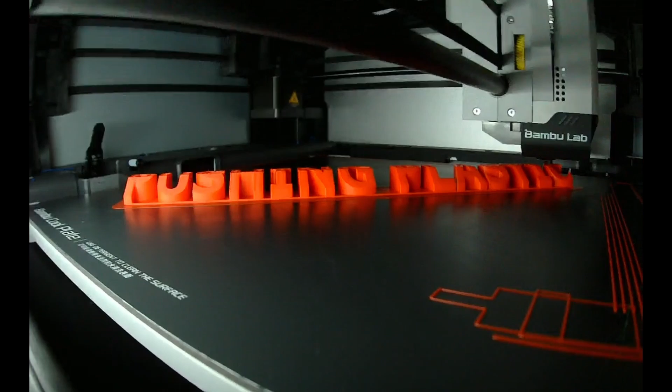I'm going to use this oversized chess pawn to demonstrate what adaptive layers are and how to use them. The first thing we'll do is add adaptive layers to our settings menu by coming up here to the search bar and typing the word adaptive. And the category for experimental settings comes up right away. Now, adaptive layers have been a part of Cura since sometime around 2017 or 2018. I'm not sure why they're still considered experimental.

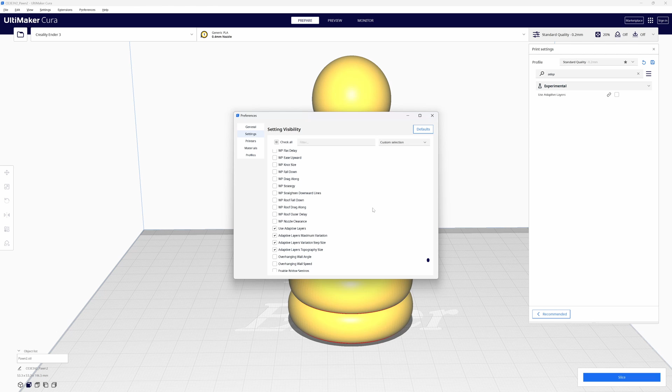Click on the settings symbol and scroll on down until you find Use Adaptive Layers and check the box. Also check the boxes for Adaptive Layers Maximum Variation, Adaptive Layers Variation Step Size, and Adaptive Layers Topography Size, and close out the Settings Visibility dialog box.

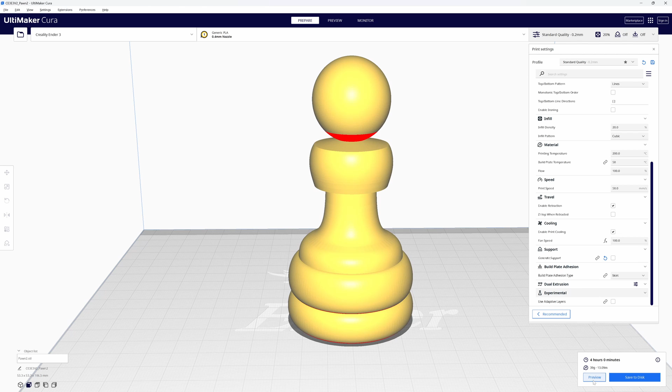Now scroll on down in the print settings to the bottom and you'll find experimental settings. And there's where the adaptive layers options are. I'm going to leave it unchecked for now. Let's slice this and take a look. It's going to take 4 hours to print with the standard quality 0.2 millimeter layer height profile that comes with Cura. Let's take a look at the preview.

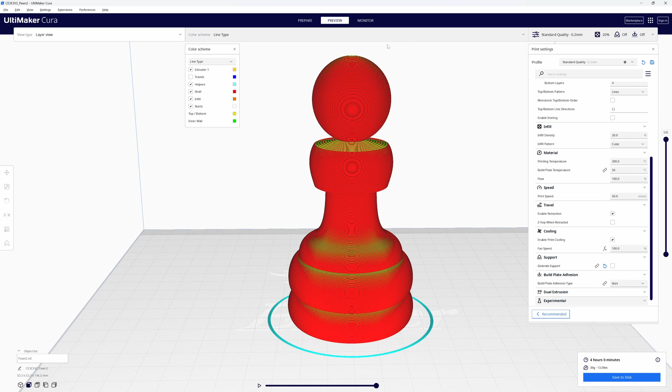And as you can see, there really isn't anything different that we haven't seen from any other slice profile or model. Now, take note of the number of layers, 532. Now let's come up to the top of the screen and take a look at the bar that says color scheme. It's currently set for line type. Click on that bar and change it to layer thickness.

Now we're looking at a greenish blue preview. This color bar over here is showing our thickness range. Currently the dark blue is showing a layer height of 0.2 millimeters, and yellow is also showing 0.2 millimeter layer height. In the middle is this greenish blue area. No big deal there, right?

Yeah, I know. Get to the point already.

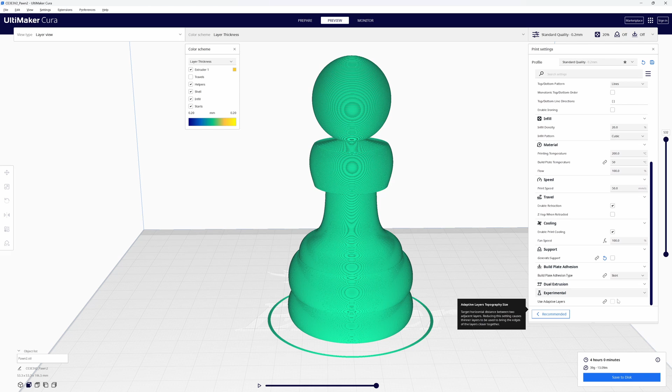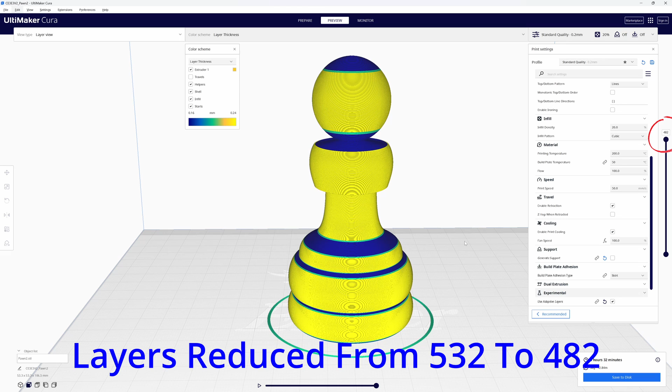Okay, so let's enable Use Adaptive Layers and reslice. Now we've got all kinds of cool colors going on here. Before we get into the colors, notice that we dropped off almost 30 minutes from our print time, and our layer count went from 532 down to 482. Our model is still the same physical size. It's just using fewer layers, less time, and less material.

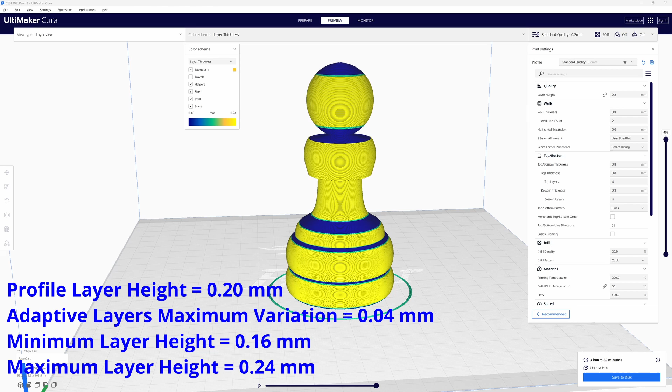Now, let's look at our settings and see what's going on. The first setting we're going to look at is the maximum layer variation. We're currently set to 0.04 millimeter. Our profile is using a 0.2 millimeter layer height, so our layer size range will be 0.16 millimeter at its smallest height and 0.24 millimeters at its tallest layer height. It's basically taking our layer height and applying a plus or minus value of 0.04 millimeters when needed.

So when we look at this color scheme for the piece, it's showing a layer height of 0.16 millimeter for the dark blue. It's taking the maximum variation of 0.04 and subtracting that from our layer height in our profile of 0.2 millimeters to give us 0.16 millimeters. Wherever we see the dark blue on the model, we're going to be printing at a layer height of 0.16 millimeters, giving us a better quality on all of these curves and the slopes.

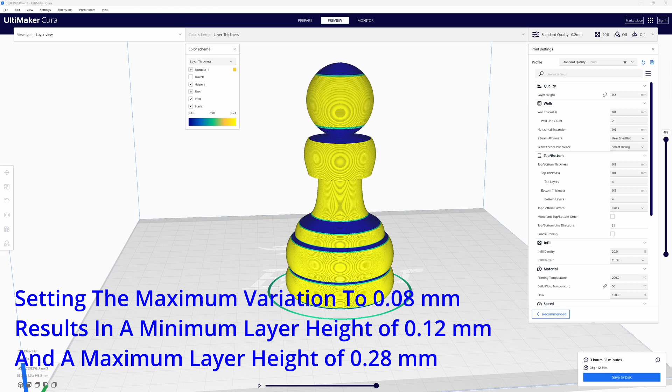If you were to set the maximum variation to 0.08 millimeters, those layers would print out at 0.12 millimeters. That's the same as Cura's super quality profile setting. The yellow area, those layers are now printing at 0.24 millimeters instead of 0.2 millimeters. We went up in height by the value that we have set in our maximum variation. You'll notice that happens in the areas that are straight vertical parts or just the areas where the curves aren't really detailed. You'll also see some areas of the green that's still printing at 0.2 millimeters.

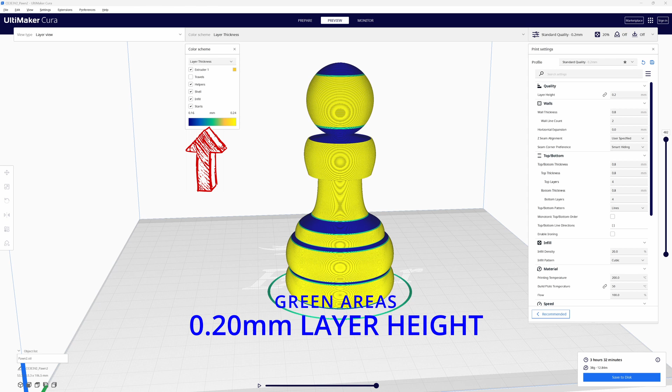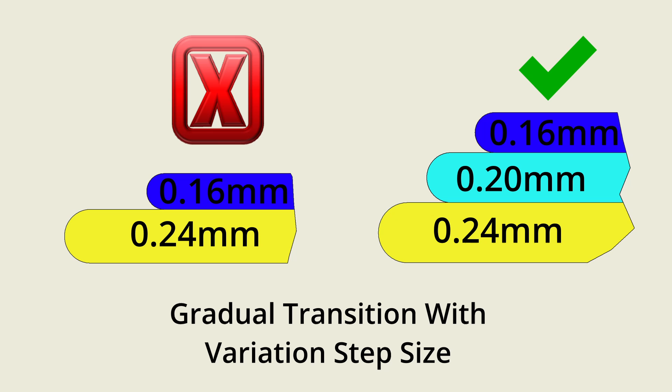The next setting we're going to look at is the adaptive layer variation step size. This is the increase or decrease of the next layer when compared with the previous layer. Since the layer height range we're using is from 0.16 up to 0.24 millimeters, we don't want one layer going from 0.16 right up to 0.24 millimeters. That would leave a pretty nasty appearance. You would want to go from 0.16 to 0.2, then up to 0.24 millimeters.

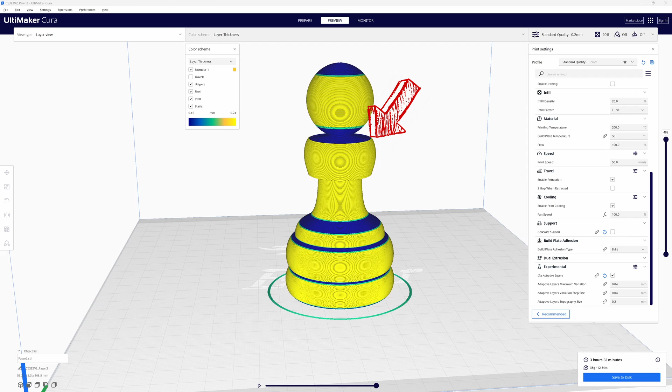If you look at our sliced model, you'll notice that in almost every case, the yellow areas that are using the 0.24 millimeter layer height are separated by at least a thin green band where it's printing at 0.2 millimeters to make the gradual transition to the darker blue area of 0.16 millimeters. Except for this area right here, where there's a sharp edge rather than a gradual curve. Pretty smart of Cura to figure that out for us.

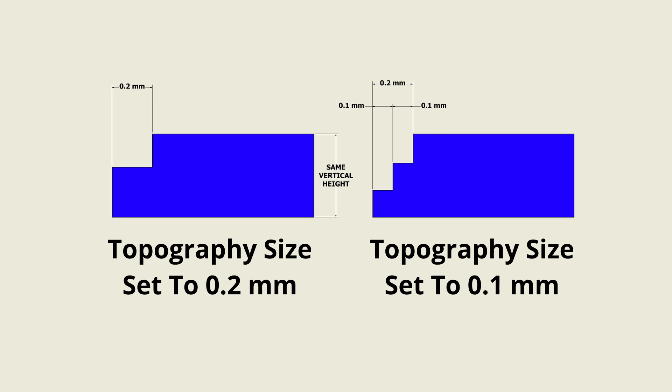The final setting is the adaptive layers topography size. This setting is the horizontal distance between two adjacent layers. I like to think of this as like the tread on a staircase, except in this case, as the tread changes, so do the risers, meaning more or less steps to climb to reach the same vertical distance. If you increase this setting, thicker layers are used and the edges of each layer are moved further away from the previous edge. Decreasing this setting will use thinner layers and bring the edges of the layers close together. This gives us a nicer looking transition in curved or sloped surfaces.

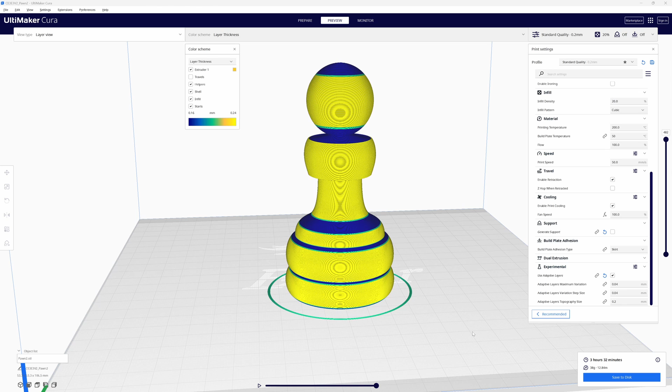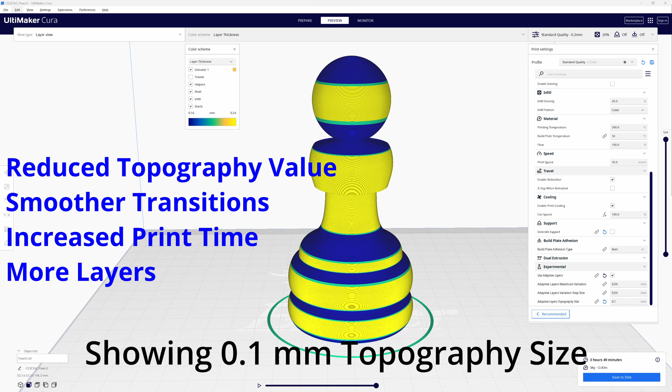But going too low is going to increase the number of layers and increase the print time, as we can see when we compare the same chess piece with a 0.2 millimeter topography size and changing the topography size to 0.1 millimeter. Our print time increases from 3 hours and 32 minutes to 3 hours and 49 minutes, and our layers increase from 482 all the way up to 524. But overall, the physical height of our model has not increased at all. I almost always use the default setting of 0.2 millimeters for my topography size.

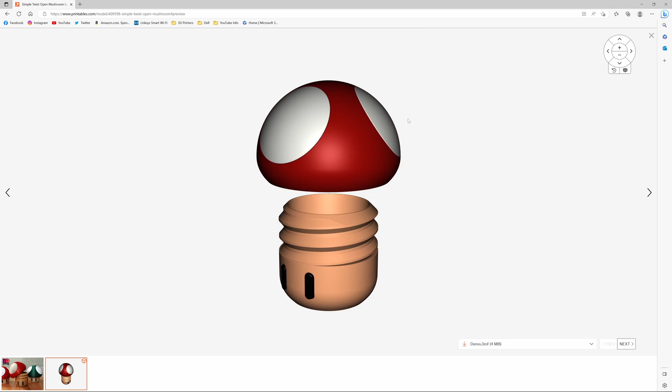I downloaded this simple twist open mushroom from printables.com. It was created by 3D Printy. It's a nice model. Now, the top and the dots are primarily dome shaped, and because of the lack of straight vertical sections, it may not be the best model to demonstrate time savings, but it is a great model to demonstrate how adaptive layers can improve quality.

I printed this one with the standard 0.2 millimeter layer height, and this one with the same profile, except I enabled the adaptive layers and set the maximum variation to 0.04, the variation step size to 0.04, and the topography size to 0.2. All are the default settings in Cura. I printed only one base because I only need one. One of these two tops will be saved, and the other will end up in the tub of shame with the other failed prints, scrap purge lines, the skirts, the rafts.

At a quick glance, they look similar to each other. I'm noticing a rougher looking top on this one, while the dots are looking a little smoother on this one. I'm going to be keeping this one printed with the adaptive layers enabled and scrapping this one.